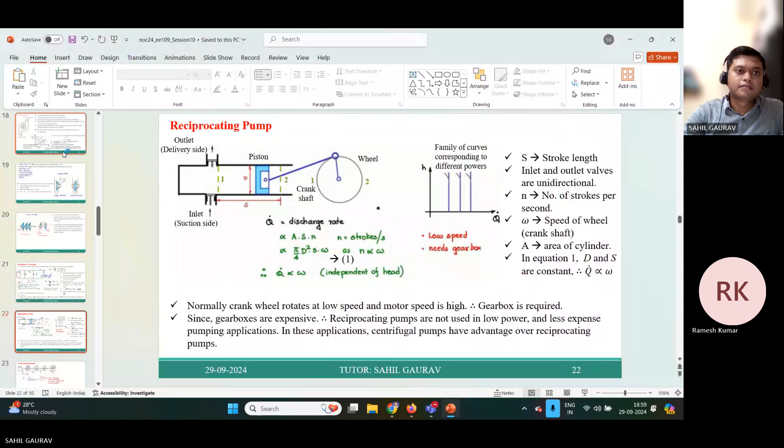Hello, Ramesh. Sir, I'm audible, good evening. We will wait for 3 to 4 minutes, if somebody joins, then we will start. Okay, but already time has passed, they can start.

I am in this meeting, nobody else is in this meeting. So we can wait, no problem, according to me, for a few minutes. One more attendee came. We can wait 1 to 2 minutes more. Yeah, sure.

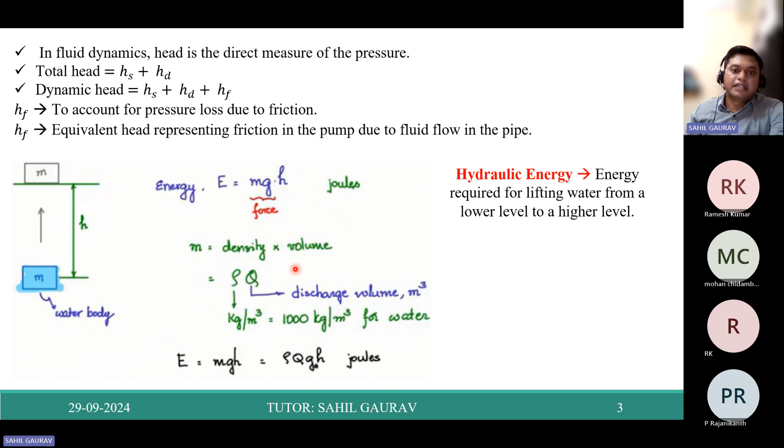Now if you substitute this value and write it in terms of volume of water and this height, with density of water as 1000 kg per meter cube and gravitational acceleration written as 9.81, it comes approximately equal to 10 to the power 4 Q H in joules.

Now there are some conversions that are very useful. We know this electrical energy unit: 1 unit is represented as 1 kilowatt hour. So if you write it in watt second or joules, 1 kilowatt equals 1000 watt, and 1 hour equals 3600 seconds. So it becomes equivalent to 3.6 into 10 to the power 6 watt second, or joules.

So if you substitute this, as we have seen this potential energy in joules, now if you want to write it in kilowatt hour, it is divided by 3.6 into 10 to the power 6, and you get kilowatt hour. So it will be 2.725 into 10 to the minus 3 Q H kilowatt hour, where volume is in meter cube and H in meter.

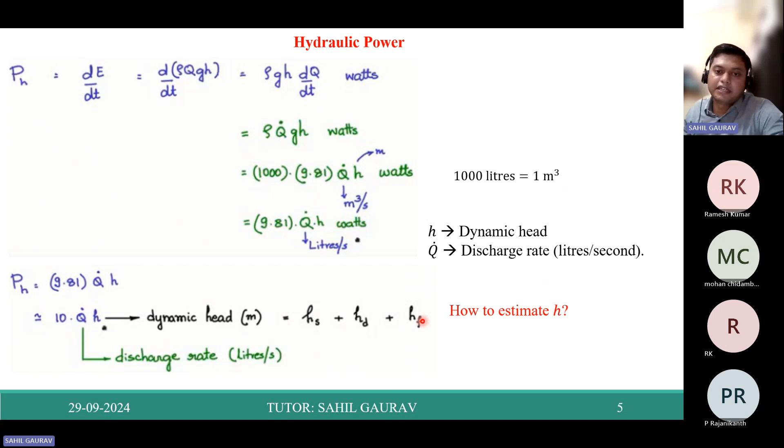So finally we are having this expression, where this discharge rate is in liters per second and height is in meters, and where this dynamic head equals HS plus HD plus HF. Now the question comes, how do we estimate H? We know this suction head, we know this discharge head, but how do we estimate this friction head loss? Let us see how we can estimate this HF, this head loss due to friction.

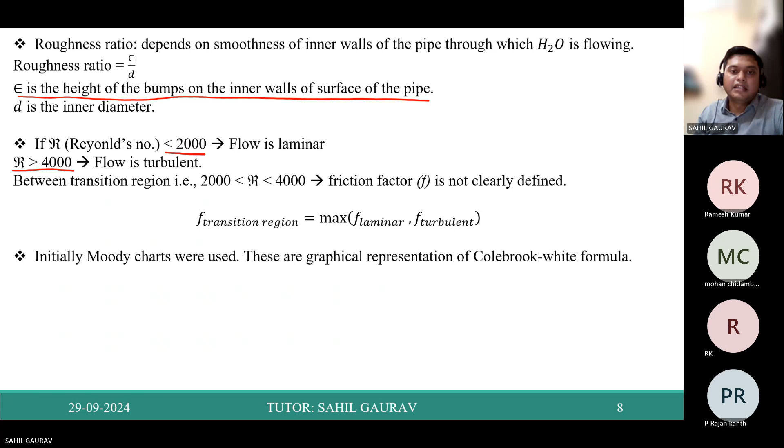So if the Reynolds number is 3000, we will find it through the laminar way and turbulent way, meaning we apply the laminar method and the Colebrook-White formula, and we take the maximum of it as the friction factor. Earlier, to find this friction factor, Moody charts were used, and these are the graphical representations of the Colebrook-White formula.

The friction factor is less for lesser roughness ratio value, the friction factor is of lesser value for the same Reynolds number. As the roughness ratio increases, the friction factor also increases.

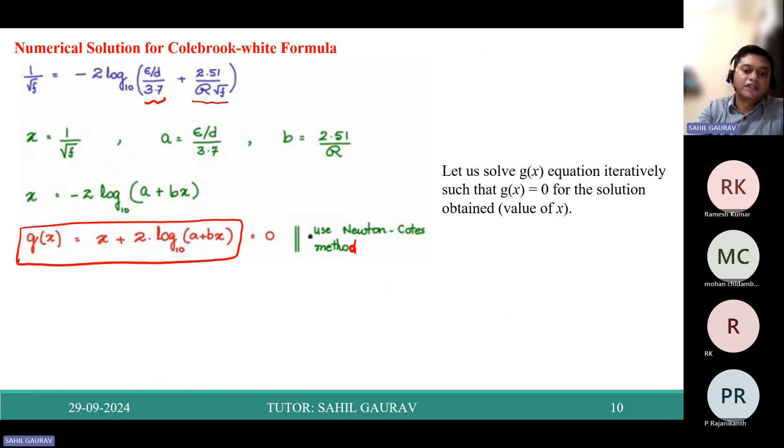So we have this function, and let us take the partial derivative with respect to x: we get 1 plus 2b upon (a plus bx). So Newton's method formula is g(xk) equal to delta x times del g upon del x at xk, where delta x is written as xk minus xk+1. This is the iteration.

So we will first assume some initial value, and using this Newton's method formula, we will iteratively solve this equation. Now you have to substitute the values for g(x) and g'(x) to solve this equation, and you will get the next term.

So we substitute g(xk) equal to x plus 2 log 10 of (a plus bx), and find g'(x), which comes out to 1 plus 2b upon (a plus bx). Upon simplifying, you will get the term for xk+1.

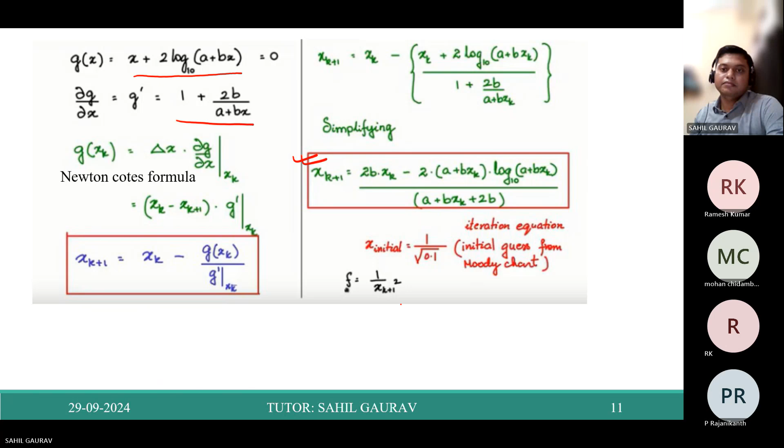So this is the summary of hydraulic power calculation.

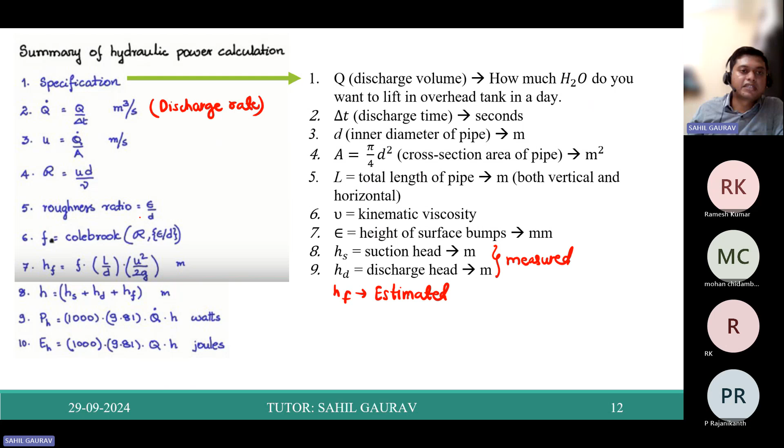So another term we need to know is HF, which should be estimated or calculated. Upon knowing this roughness ratio, we apply this based on the type of flow - laminar or turbulent. If there is turbulent flow, then you apply the Colebrook-White formula expression, and from there you get the friction factor, which you apply in this expression.

What is this expression called? This expression is called the Darcy-Weisbach formula.

Now we have all the head expressions, so we will find the total dynamic head. The total dynamic head is the sum of the suction head, discharge head, and the head loss due to friction.

Now we have to substitute this equivalent head in the hydraulic power calculation. The hydraulic power calculation is 1000 into gravitational acceleration constant 9.81 into discharge rate into this height, or equivalent dynamic head.

Then we will find the hydraulic energy. This hydraulic energy is what comes here - you have to take the volume of water irrespective of the discharge rate, taking the discharge volume while calculating the hydraulic energy.

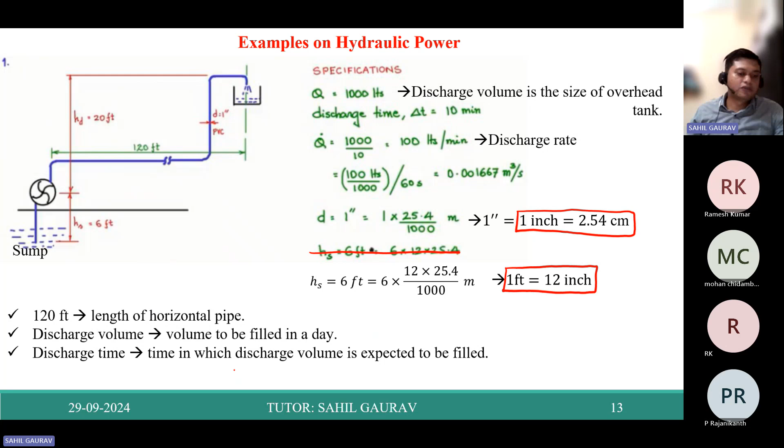As I said, this discharge volume is the volume to fill in a day, and discharge time is the time in which discharge volume is expected to be filled. Now coming to this total length of pipe.

Total length of pipe is suction head, and then we have this horizontal pipe length, and then the discharge head. So this comes to 146 feet. So you have to convert this into meter, and then you will find the cross section area of pipe, and then you will find the water velocity.

Then you will find this Reynolds number, and this Reynolds number is greater than 4000, therefore it is turbulent flow. And since this pipe is PVC, the height of bump on this inner pipe surface is 0, so this roughness factor is also 0.

And since this is turbulent flow, we will use the Colebrook-White flow expression to estimate this friction factor, and we got this friction factor as 0.018683, and then we'll use this head loss due to friction from the Darcy-Weisbach formula.

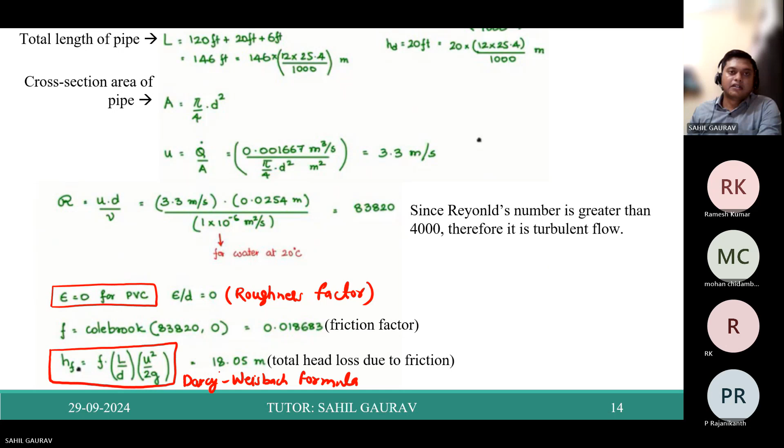Now you can find this total dynamic head: suction head plus discharge head plus head loss due to friction. And then we will find this hydraulic power. So it comes to 425 watt. So this much hydraulic power we needed to pump the water from the sump to the overhead tank.

Now, apart from this, in the previous example we have not used solar PV. Now in this example we will use solar PV. In this case of solar PV, it is based on the radiation. So let us not put a constant for this delta T, that is discharge time. Apart from taking discharge time as 10 minutes or something, very less time, let us link it to the insolation at the place, meaning we are giving the discharge time more.

So in solar PV, what we used to do is increase the overhead tank size because we have increased the discharge time based on atmospheric effects, meaning based on the irradiation. So we have to increase our overhead tank so that we have the capacity to discharge in more time.

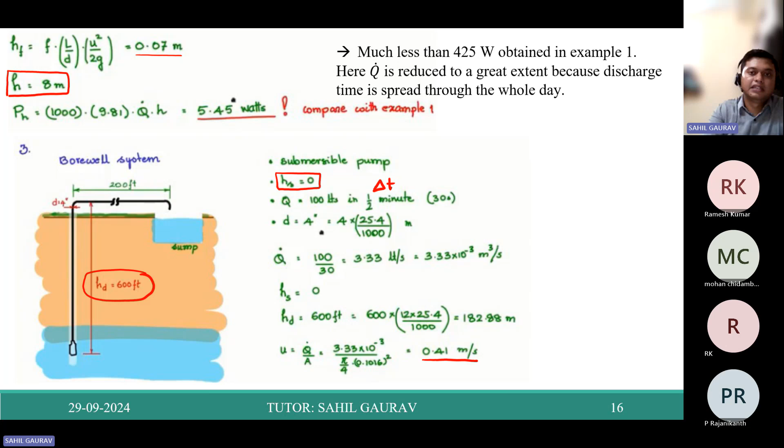Then you can find the Reynolds number to find the head loss due to friction. Reynolds number is u d upon nu, and nu is given in the problem, so it comes out as 41,656. So it is turbulent flow, and the height of bump in the pipe is given as 0.1 mm for a steel pipe.

So we have taken the steel pipe here, and the roughness factor we got is 0.001. Once the roughness factor is known, and since this is turbulent flow, we will apply the Colebrook-White formula to get the friction factor. Upon knowing this friction factor, we will apply the expression H to get the head loss due to friction. This is an empirical relationship, and this is the Darcy-Weisbach equation.

Now we'll find the total dynamic head, that is the sum of all the heads: suction head plus discharge head plus head loss due to friction. This gives us 183.4 meters. Now we'll find the hydraulic power, which comes as 5.99 kilowatts. So for this application, you can use a 7.5 or 10 HP motor, because you have to use more than the hydraulic power that is needed. So you can take the motor accordingly.

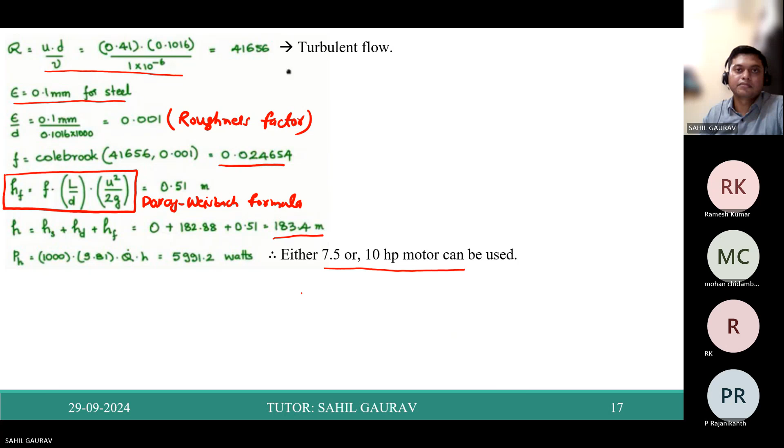Now coming to the types of pumps. There are two pumps covered in this course: one is the centrifugal pump, and the other is the reciprocating pump. The centrifugal pump comes under the class of dynamic pumps, and its operation is based on centrifugal force. This pump rotates at high speed and creates a pressure difference. This pressure difference created due to high speed rotation sucks in water and routes it towards the center. We will see one video based on centrifugal and reciprocating pumps. Because of the centrifugal force, water is pushed out at the outlet creating pressure difference, and the process continues. Therefore, the higher the speed of water, the larger the pressure difference, and the more the discharge.

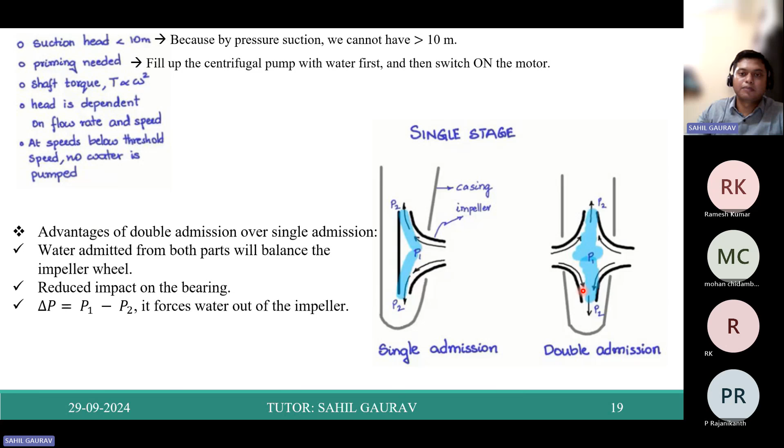If you see this multi-stage, you have cascaded pumps. So in multi-stage also there will be single admission and double admission. This multi-stage is used for deep wells, or in case of submersible pumps where you have to pump to a greater head, multi-stage impellers are normally in the pump. In multi-stage, delta P gets added from one stage to the next. Because of the addition of pressure, there is sufficient differential pressure from first to last stage, which helps in pumping water to greater heights. So this is the benefit of multi-stage, generally used for deep wells or submersible pumps.

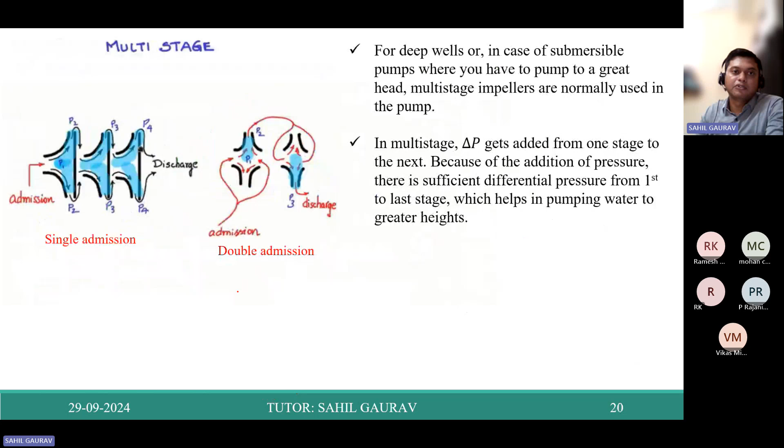Normally the crank wheel rotates at lower speed while the motor speed is high, therefore we require a gearbox. This crankshaft doesn't have that much speed, while the motor speed generally is higher, so we require a gearbox if we are using the reciprocating pump.

And since gearboxes are expensive, reciprocating pumps are not used in lower power and less efficient pumping applications. In this application, centrifugal pumps have an advantage over reciprocating pumps.

And this is the water pumping system. So we have a PV panel and power converter, motor, then pump, and then hydraulic system. So how much PV power would be required for the pump to deliver that much hydraulic power?

Based upon the efficiency of these interfaces - power converter, motor, pump - it comes to approximately 2 times the hydraulic power. So this is the size of PV required for the Hatmin condition of the annual insolation.

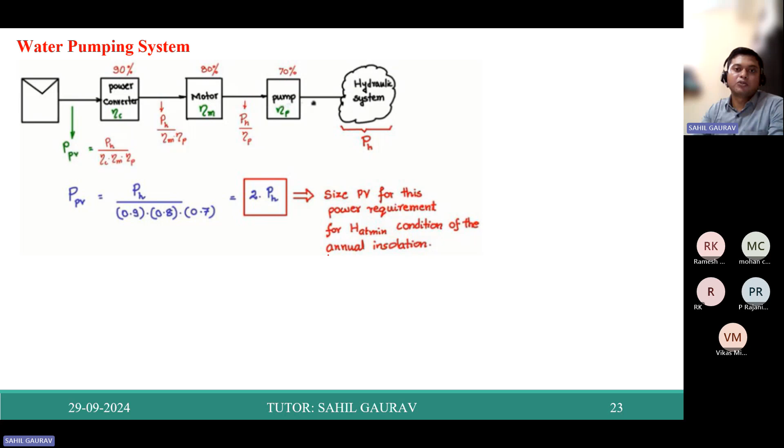And there are some pumped hydro applications. I would say you go through it.

This one is water pumping, so it is the same - here the same motor is used as generator and the same pump is used as turbine.

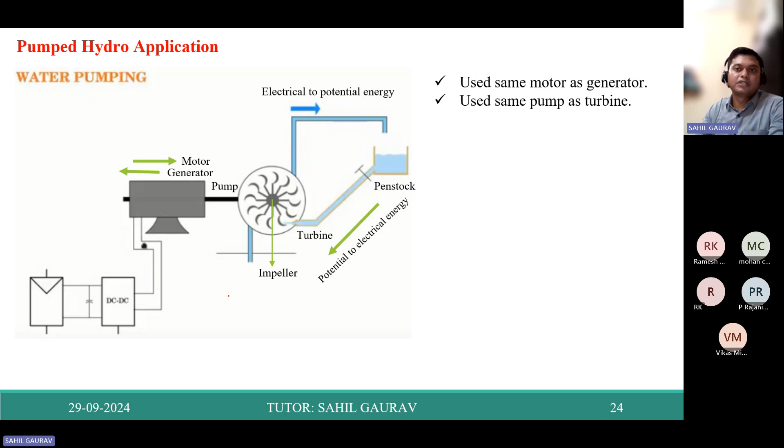While in this decoupled system, we have a different motor and a different generator. So the advantage of the decoupled system is that water can be pumped up at lower power and spread across the whole day.

This hydraulic power needed is low, and the electrical output during night time can be high power output in AC or DC form. But the disadvantage is that you need to install two systems, that's why it has additional cost.

And these are some of the representations for this hydropower expression.

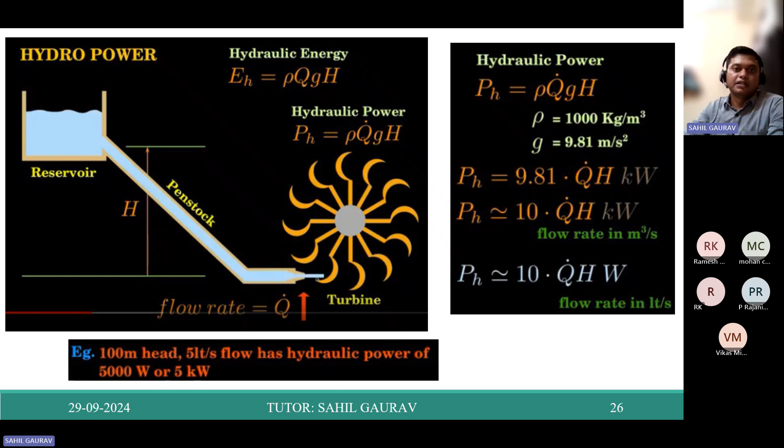I would suggest you go through these slides, and because we have less time, let us come to solving the problem. But before that,

I have put two videos so that you can see and differentiate between the reciprocating pump and the centrifugal pump. The first one is the reciprocating pump.

Can anyone verify that you are able to listen to the video? When I am running it, are you able to listen to the video? Yeah, it's visible. Okay, and it's running.

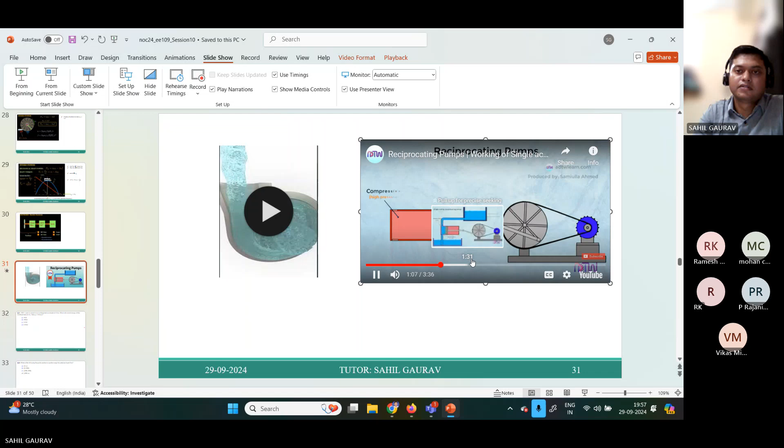So I will just keep it here. You can go through this. So you can see this reciprocating pump.

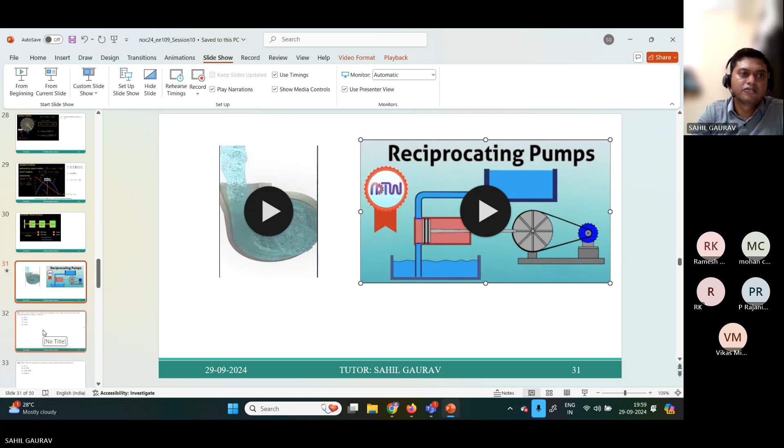So let us see the first problem. The first problem is quite an easier one.

1000 liter of water is stored in an overhead tank at a height of 10 meter. What is the stored energy of that overhead tank in kilojoule? Take the gravitational acceleration constant as 9.8 meter per second square. And the options are shown over here.

So I would request you all to solve parallelly with me. And if you are getting the answer, you can tell your answer or type it in the chat box.

Okay, you are not able to listen to the sound. No problem, you can find many types of videos, but I hope you will see the visualization of how these are working - this reciprocating pump and centrifugal pump.

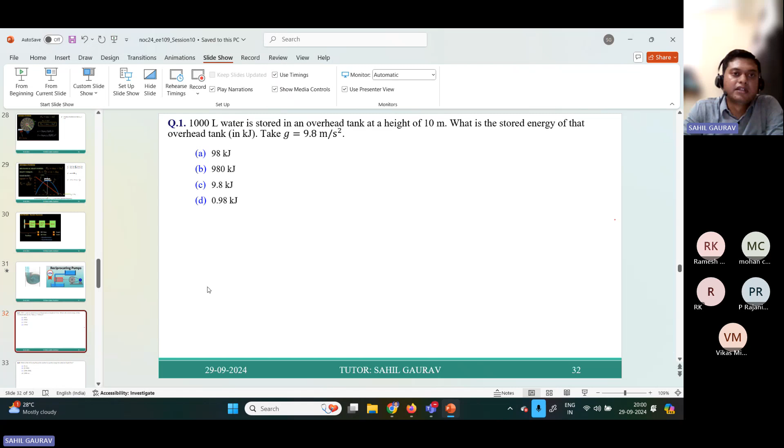So let us solve problem number 1. First we will write what is given and what they are asking.

The given is discharge volume, so discharge volume is given as 1000 liter. Whenever liter is given, first you need to convert it into meter cube. So 10,000 liter, we convert it to meter cube, we know that we have to divide by 1000.

So it will be 10 meter cube. And now height is given - here there is no different types of height, it is single, so you can call it static height. It is given as 10 meter.

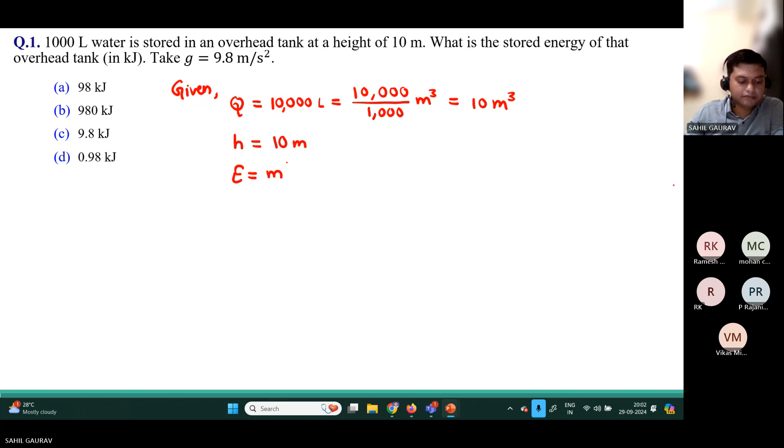And what is the stored energy of that overhead tank? Q, we know is 1000 liter given.

Okay, it is a mistake, it is 10,000, not 1,000.

So you can find the stored energy, that is the potential energy. So potential energy will come as mgh, so you can write m equal to rho times Q.

Rho is 1000 kg per meter cube, then Q is 10 meter cube, g is 9.81 meter per second square, and h is 10 meter.

So you will get 980 into 10 to the power 3 joule. The answer is 980 kilojoule. So the correct answer is B, 980 kilojoule.

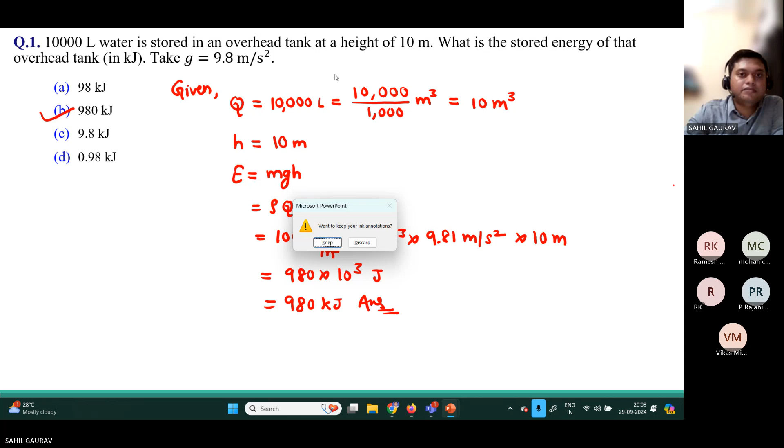Yes, RK, if you have taken Q as 1000 liter, then it is correct. Rajnikant, you are also correct. Very good.

Now let us see the next problem. The second problem is: which of the following Reynolds number is a perfect range for turbulent liquid flow? We have discussed it in class and revised today also, so I want you all to give the answer.

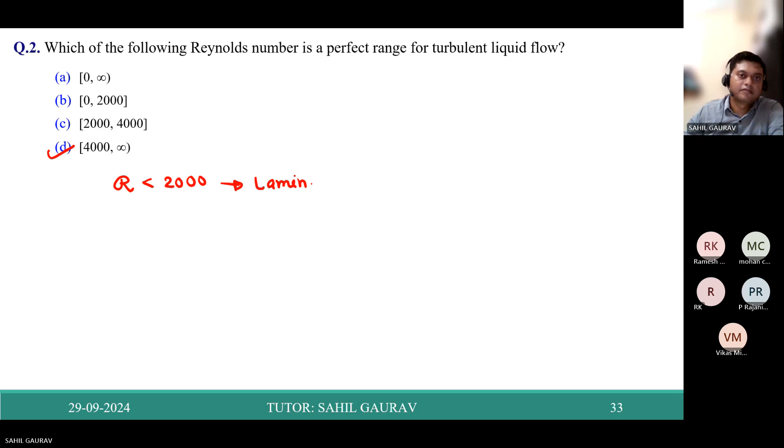Yes, it is D, RK, you are true, that is D. So when Reynolds number is more than 4000, water has turbulent liquid flow, so D is the correct answer. And when this Reynolds number is less than 2000, then it is laminar flow. And when this Reynolds number is more than 4000, it is turbulent flow.

Let us see the next problem. What is the roughness factor for a steel pipe with 0.8 inch diameter? This is also quite simple. You have to find the roughness factor for a steel pipe with 0.8 inch diameter, so you need to know how to convert inch into meter or millimeter.

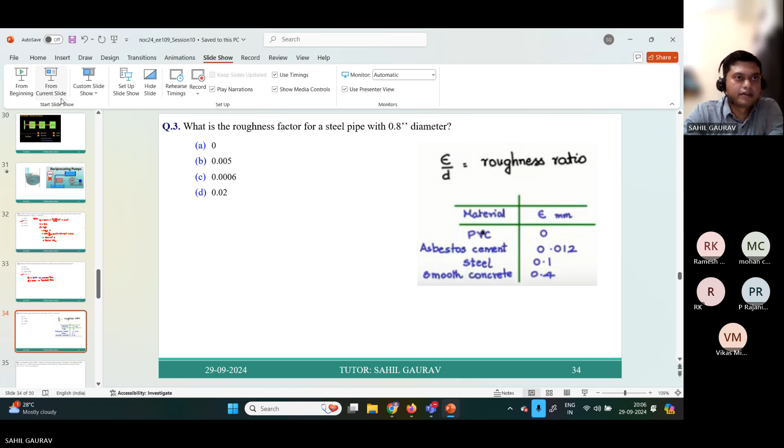We know the roughness factor expression: epsilon upon d, where epsilon is the height of bump inside the pipe. This is a steel pipe, and steel pipe has epsilon equal to 0.1 mm. So 0.1 mm is the epsilon. We have to find the d, so how will we find the d?

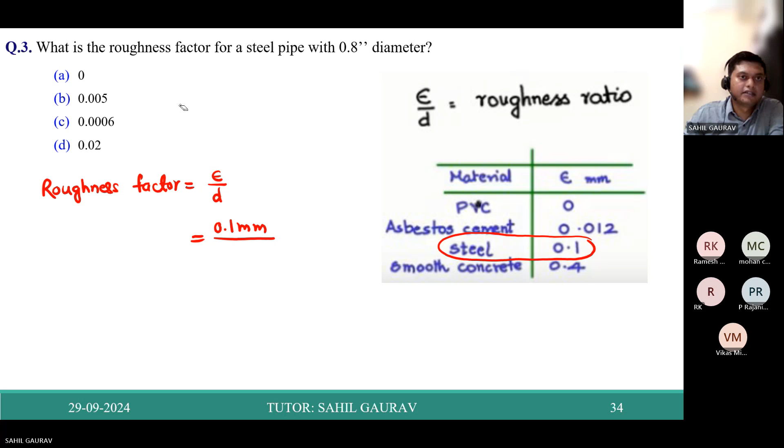So epsilon of a steel pipe is 0.1 mm, and diameter of pipe is 0.8 inch. Converting inch into millimeter, you have to multiply with 25.4 mm. So put here 0.8 into 25.4 mm, and you will get 4.92 into 10 to the power minus 3, that is 0.00492, approximately equal to 0.005. So correct answer is B.

Yes, RK, you are correct. Correct answer, Rajnikant, you are correct. Very good. So those who are solving problems here, that is very nice. Don't leave it for later, because it will just become late.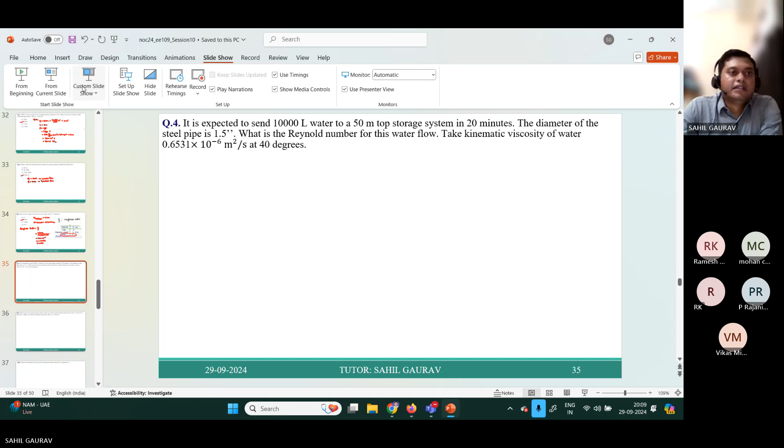So you have to find the Reynolds number, and for Reynolds number, you have to find the water velocity, and for water velocity, you have to find the discharge volume. So let us first write what things are given here.

We are given discharge volume as 10,000 liter, and height is given as 50-meter storage system, and then delta T, discharge time, is given as 20 minutes, and then diameter of a steel pipe is given as 1.5 inch.

Diameter of pipe is 1.5 inch. Let us convert it right now to meter. So 1.5 inch into millimeter will be 25.4 millimeter, then you have to divide by 1000 to get it in meter. So you will get 0.0381 meter.

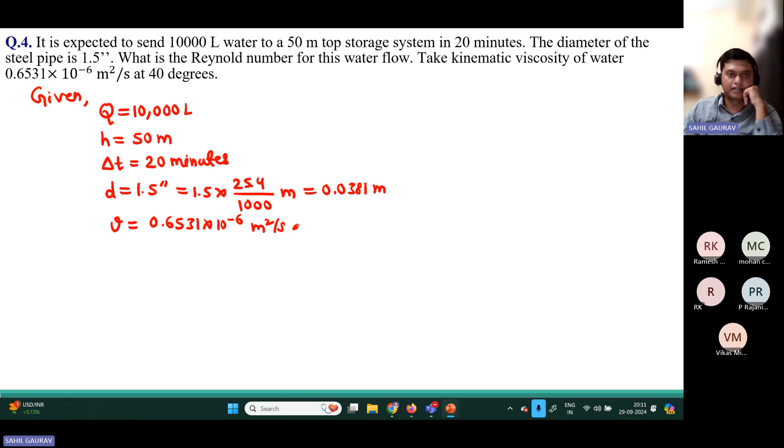The kinematic viscosity of water is also given: 0.6531 into 10 to the power minus 6 meter square per second at 40 degrees Celsius. You have to find the Reynolds number.

You have to find the Reynolds number. First we need to know the Reynolds number expression, that is u d upon nu. So this is the Reynolds number expression. We know d and nu, but we don't know the u. So before that, we will find the u. u will be q dot upon a.

We don't know q dot, so we will first find the q dot. q dot, the discharge rate, is q upon delta t, discharge volume upon discharge time. This discharge rate will be 10,000 liter. 10,000 liter you can write in meter cube, so it will be 10 meter cube.

And then 20 minutes, you can write in seconds. So it is 1200 seconds, which is 8.33 into 10 to the power minus 3 meter cube per second.

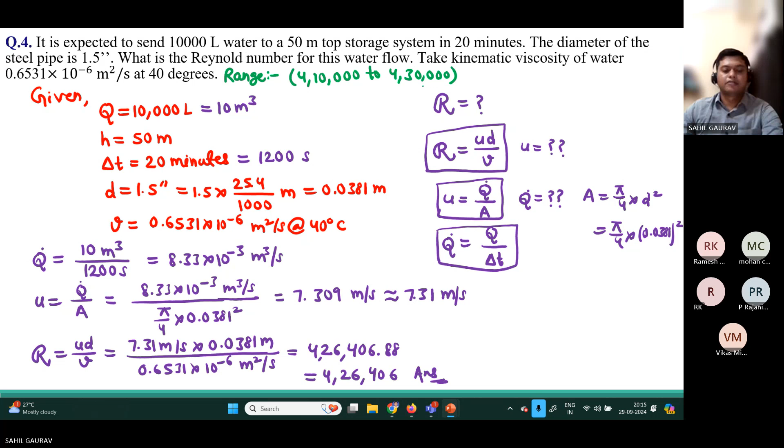They have provided answer in the range, and the range they have provided for this problem is 4,10,000 to 4,30,000. Yes, 4,26,406. Very good, Rajnikant.

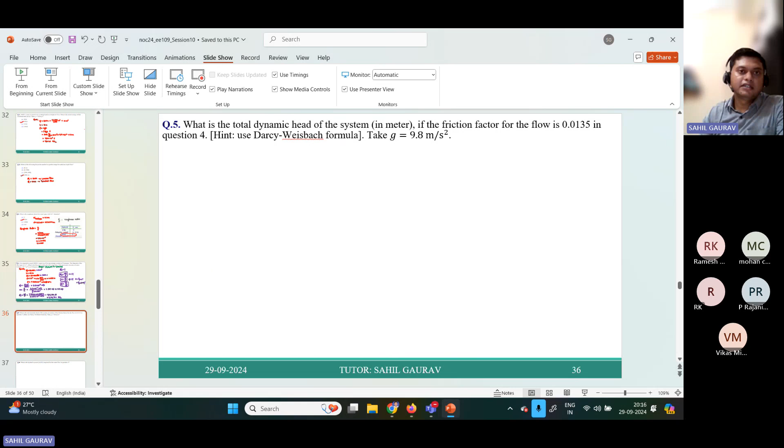So let us see the next problem. What is the total dynamic head of system in meter if the friction factor for the flow is 0.0135 in question 4? So they have provided the friction factor. You have to find the total dynamic head. Let us show.

So in this problem, they have provided the friction factor 0.0135 meter, and acceleration constant they have told you to use 9.8 meter per second square, and you have to use this Darcy-Weisbach formula. This friction head equals F into L upon D into U square upon 2G.

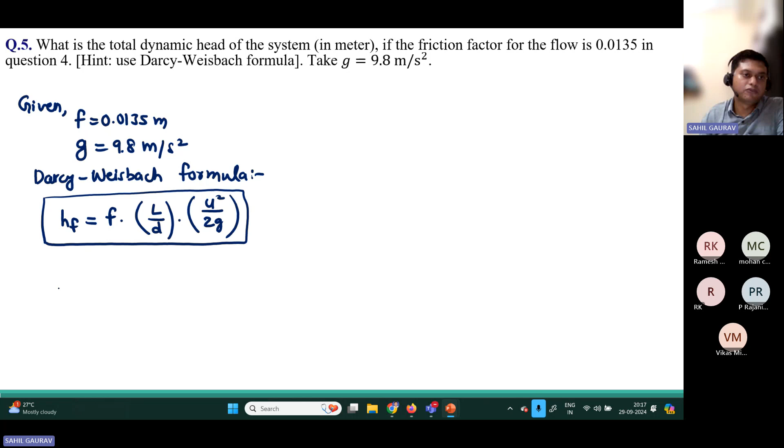So what are the things given here? For using this Darcy-Weisbach formula, we have to use the length of pipe L, which is at 50 meter height. So length of pipe will be 50 meter. Inner diameter of pipe we have found is 0.0381 meter, and the water velocity is 7.31 meter per second.

Therefore, HF will be 0.0135 into 50 upon 0.0381 into 7.31 whole square upon 2 into 9.8.

So the head loss due to friction will be coming as 48.3 meter. Therefore, total dynamic head, that is height of the overhead tank, is 50 plus HF.

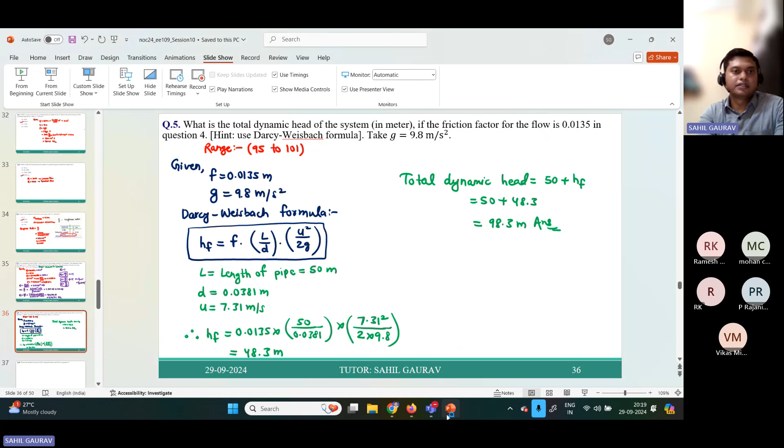I think no one got the answer. So let us, if you have any doubt, you can interrupt me. No problem. What is the hydraulic power required for water flow in question 4?

So we have found the total dynamic head. Now it becomes so easy. We have found this total dynamic head H, and we know that hydraulic power is nothing but rho G Q dot H.

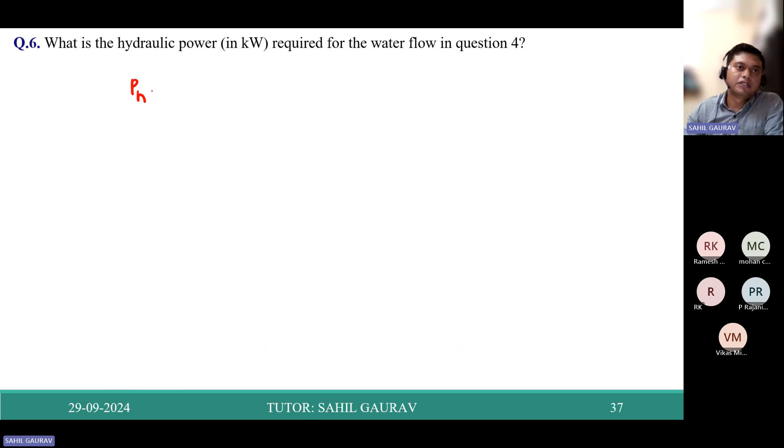Hydraulic power we know is rho q dot gh. So this simple expression we have to use, and it has been used many times. So we have to remember this expression. Rho is 1000 kg per meter cube.

We have found q dot is discharge rate 8.33 into 10 to the power minus 3 meter cube per second, and then g is 9.8 meter per second square, and dynamic head is 98.3 meter. So we will get discharge and hydraulic power as

8024.62 watt. So they are asking in kilowatt. So it is 8.024 kilowatt. So this is the answer.

And the range they provided for this problem is 7.7 to 8.3.

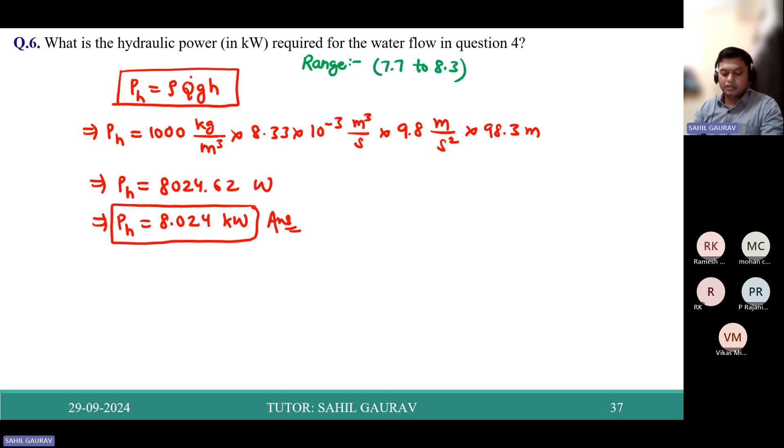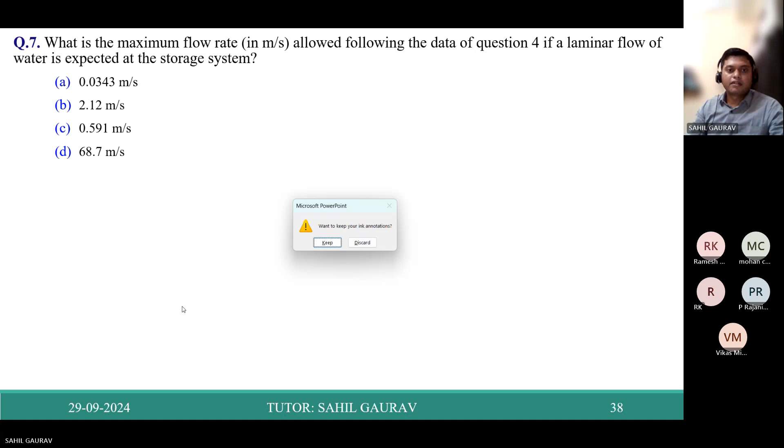Now next problem: what is the maximum flow rate in meter per second allowed, following the data of question 4, if laminar flow is expected at the storage system? So since you got this turbulent flow, but they are asking you to take the laminar flow.

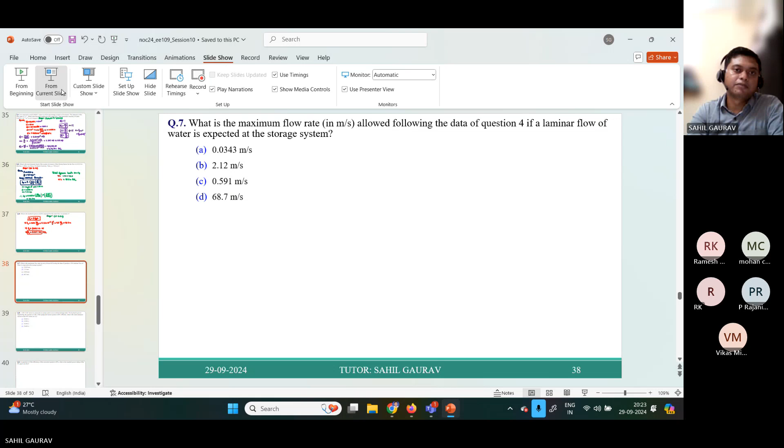You got the Reynolds number as 4,26,406, but they have asked you to take it as laminar flow and then solve the problem. So it is quite simple, not that much complicated. So they are asking U max equal to what, so that we will get the laminar flow, to get the laminar flow.

And this laminar flow condition is that you have to have Reynolds number less than 2000. This is the condition for laminar flow. So we know that Reynolds number expression is UD upon nu.

So for laminar flow, you can write U as Reynolds number into viscosity upon D. So you can get U max as R max into kinematic viscosity upon D. So this expression you have to use for laminar flow.

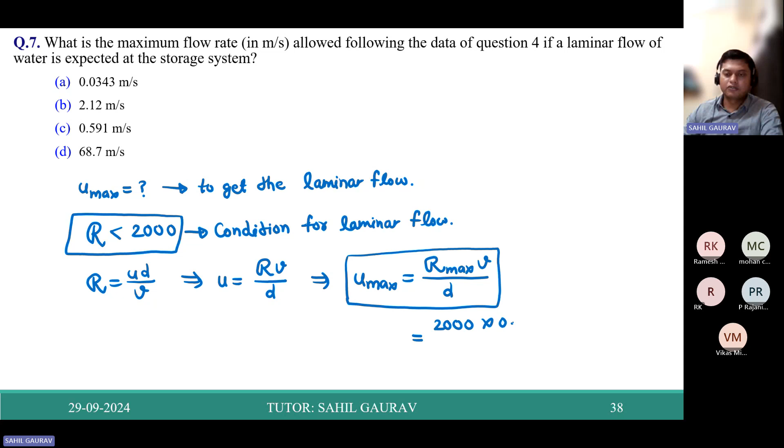So you have to put R max as Reynolds number maximum 2000. Kinematic viscosity they have provided earlier in the question, that is 0.6531 into 10 to the power minus 6 meter square per second, and D is 0.0381. So you will get the answer as 0.03428 meter per second. So the correct answer is approximately equal to 0.0343. So A is the correct answer.

Will there be a topic on mounting structure selection of metal frame that can withstand 120 km per hour of wind speed, wind load, snow load? I think this topic sir has not covered, and I think we have to investigate which.

Rajnikant, you are correct. Miss, what are you asking about, Mohan? Formula is required.

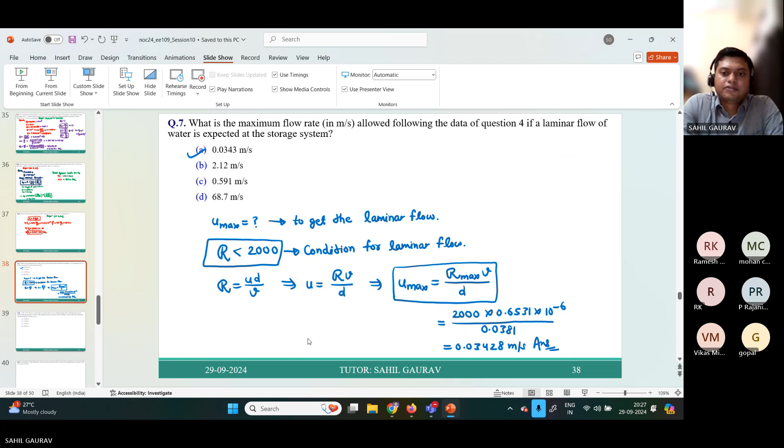So let us see the next problem. In this problem, a 400 volt DC motor is connected to pump water to an overhead storage tank. The hydraulic power required by the system is 5 kilowatt. If the pump and motor system is 60% efficient, what is the rated current of the DC motor in ampere?

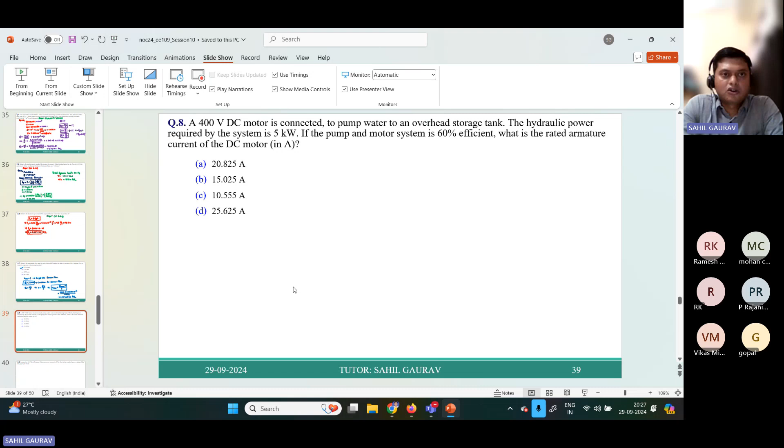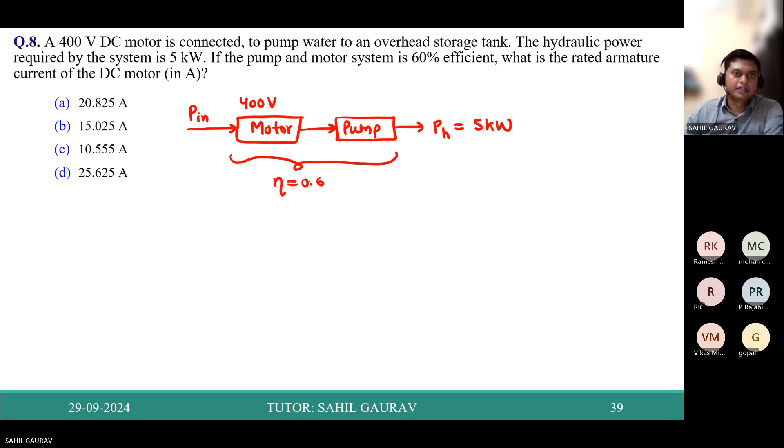So a motor is connected to the pump and that is providing hydraulic power of 5 kilowatt. If the pump and motor system is 60% efficient, so this efficiency is 0.6. What is the rated armature current of the DC motor? So let us take, we are providing the input power, and this motor is 400 volt rated. The hydraulic power they have provided as 5 kilowatt. And they are asking about the armature current of the motor.

Since efficiency is given, we can find the input power, that is hydraulic power upon efficiency. So it is 5 upon 0.6, so we will get 8.33 kilowatt. And input power you can write as voltage into armature current. So this is 8.33 into 10 to the power 3, voltage is 400 volt, armature current you have to find. So armature current you will get as 20.83 ampere. So correct answer is 20.825.

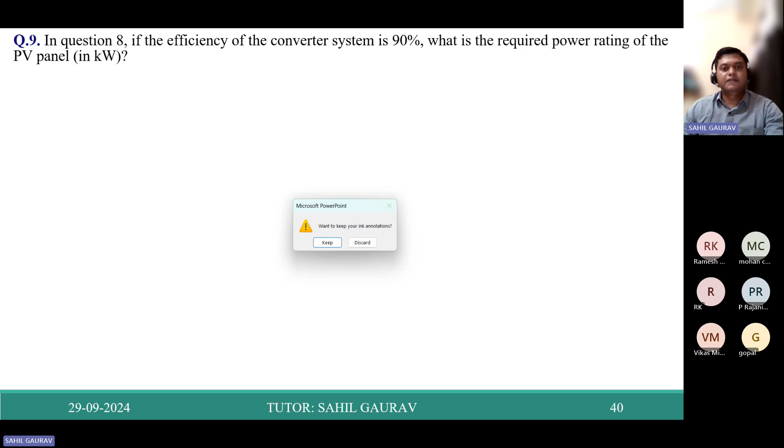Let us see the next problem. In problem 8, if the efficiency of the converter system is 90%, what is the required power rating of the PV panel in kilowatt?

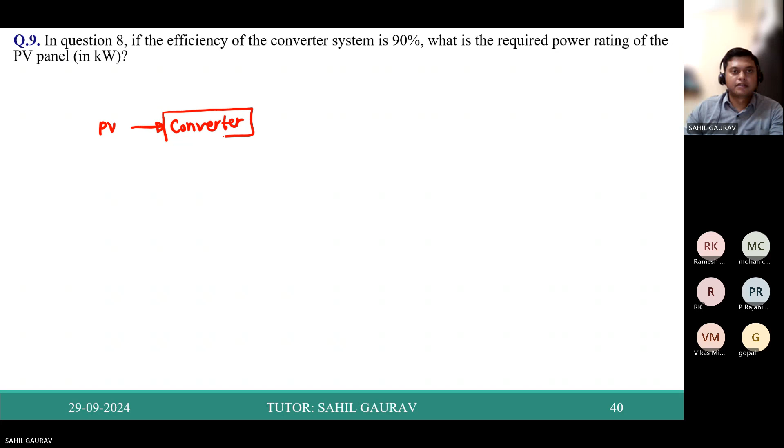So it is asking, here we are having the PV panel first, and then it is connected to chopper or some converter, and is connected to motor, and then it is connected to pump, and this is providing the hydraulic power of 5 kilowatt. So till here we have calculated in the previous problem.

So here we are getting efficiency as 0.6 and input power as 8.33 kilowatt. It is asking that converter efficiency is 0.9. So what is the power rating of the PV panel? So it is hydraulic power upon all the efficiencies, 0.9 into 0.6. So 5 upon 0.6 into 0.9. So it is 9.259 kilowatt, approximately equal to 9.26 kilowatt.

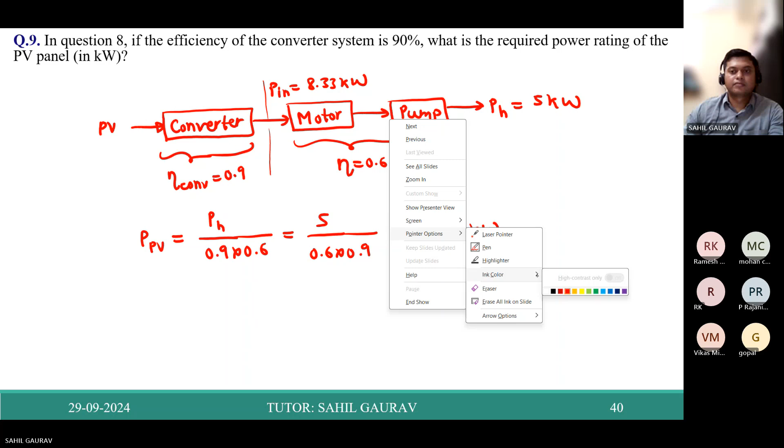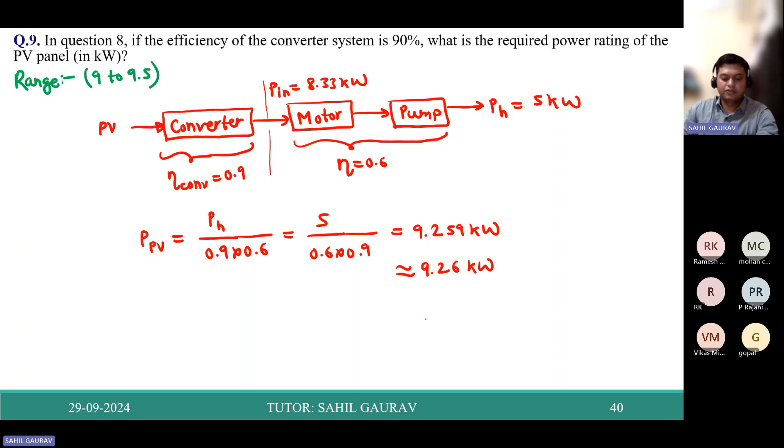And the range NPTEL has provided for this problem is 9 to 9.5. If you see the PV panel rating, then it is approximately equal to double the hydraulic power, as we have seen in the lecture. So hydraulic power is 5 kilowatt, you are getting the PV power rating as 9.26 kilowatt, so it is approximately double the hydraulic power.

Let us see the next problem. The diagram below is for: a single stage single admission centrifugal pump, multi-stage single admission centrifugal pump, single stage multi-admission centrifugal pump, or multi-stage multi-admission centrifugal pump. Please all of you write your answer in the chat box.

The diagram, this one is for which type? I got one answer, Rajnikant. Other one?

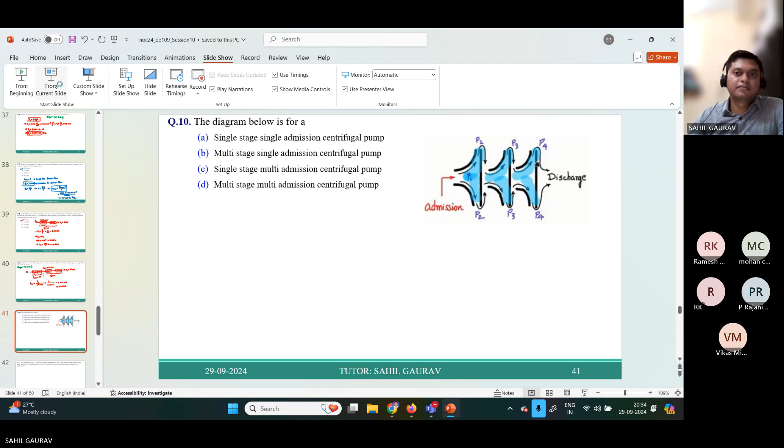Since the pumps are cascaded, it is multi-stage. So the first thing is confirmed that it is multi-stage, because they are cascaded. Now for single or double admission, you have to say the number of admissions. Since there is only one inlet, it is single admission. If there are two inlets, then it is double admission, multi-admission. So it is multi-stage single admission centrifugal pump. So B is the correct answer.

Now let us see the next problem. A water tank of 1000 liter capacity is located at a height of 10 meter. Calculate the energy storage in the water tank at 80% of tank capacity in joules. So here, the tank capacity is 1,000 liter, but they want to fill the tank 80% only. So accordingly, you have to calculate the energy stored.

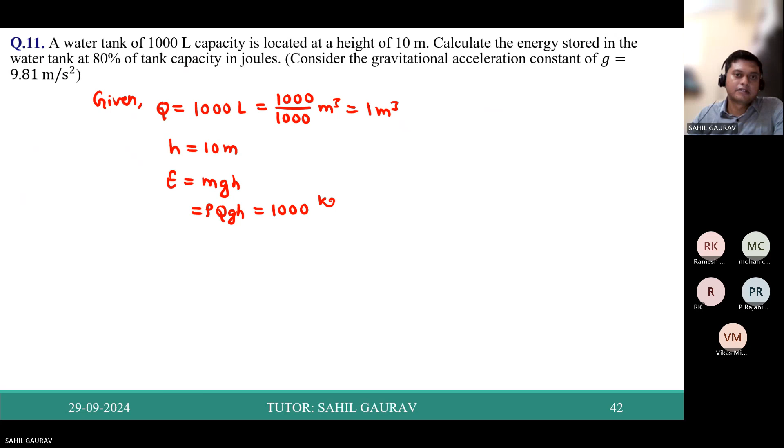Given water tank capacity is 1,000 liter. If you write in meter cube, it is 1,000 upon 1,000, so it will be 1 meter cube. And height is 10 meter. Therefore, potential energy stored will be mgh, that we know is rho Q g h. So it is 1,000 kg per meter cube, Q is 1 meter cube, G is 9.81 meter per second square, and H is 10 meter. So you will get...

98,100 joule. Is this correct or incorrect? Can anyone tell? Whatever the answer we got, is it correct or incorrect? Yes, it is incorrect. So we have to multiply with 0.8. So we have to take 80% of tank capacity, not 100%.

You can at the start take this discharge volume as 0.8 into the tank volume, or you can apply it at the end. So E into 0.8 gives 78,480 joule as the answer. And the range NPTEL has given for this problem is 78,400 to 78,600.

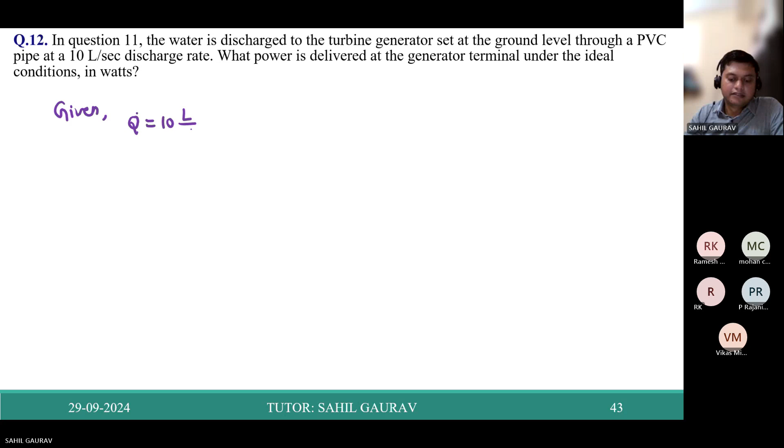Now let us see the next problem. In this problem, the water is discharged through a PVC pipe at 10 liter per second. So you convert into meter cube per second. It will be 0.01 meter cube per second. You have to find the hydraulic power.

Hydraulic power at a generator under ideal conditions. We know hydraulic power is rho Q dot g h. So it is 1,000 kg per meter cube into 0.01 meter cube per second, G is 9.81 meter per second square, H is 10 meter. So we will get 981 watt as the answer.

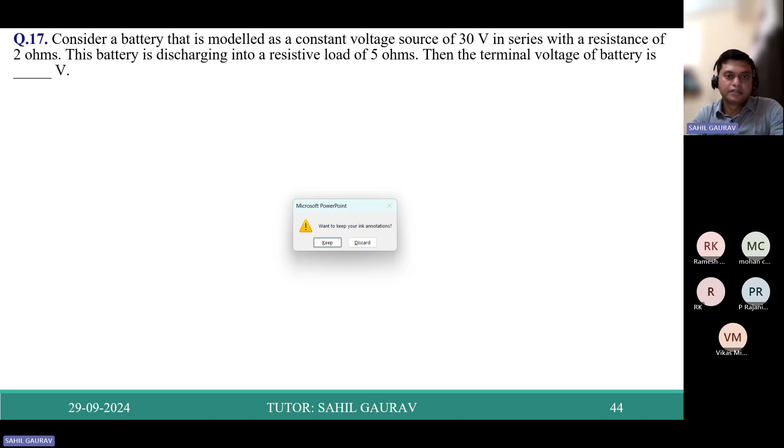And the range NPTEL has provided for this problem is 975 to 986. So let us see the next problem. Consider the battery. Oh God, I think it is... So I have to remove this. This one is the problem, problem 13.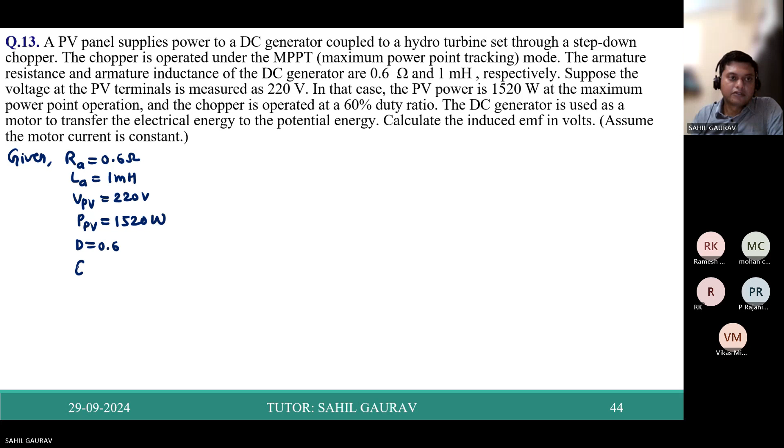This is lengthy, given in a lengthy manner, but it is not that much difficult. So let us take this and first write down the parameters they have provided. Armature resistance is 0.6 ohm, armature inductance is 1 millihenry, PV voltage is 220 volt, and PV power is 1520 watt, and duty ratio is given as 0.6. They have asked us to find the induced EMF, that is back EMF, in volts.

So let us make the diagram first. Let us take this as PV panel, connected to a step down chopper, which is connected to this DC motor. This is RA, LA, and this is EB. This is armature voltage, and this is PV voltage, 220 volt, and this is the PV current. The PV power they are providing is 1520 watt, and this duty ratio of chopper is given as 0.6.

If duty ratio is given, we can directly find this armature voltage as D into VPV, D into 220. So duty cycle is 0.6 into 220, so it is equal to 132 volt.

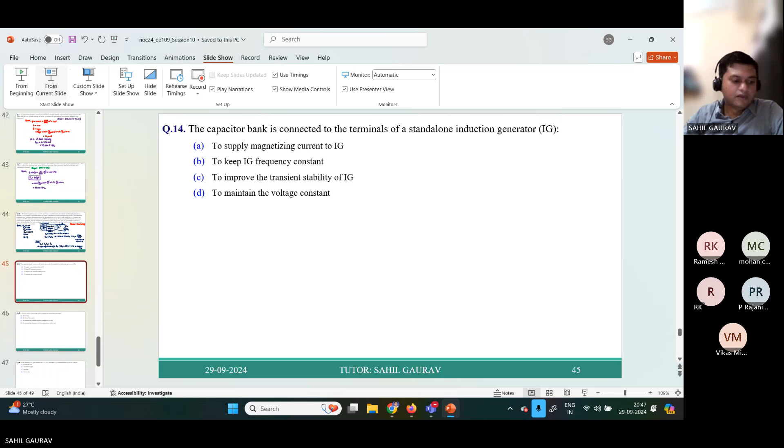Now let us see the next problem. The capacitor bank is connected to the terminals of a standalone induction generator. The reason is to supply the magnetizing current to IG. Why is it so? The induction generator does not have a separate field winding like a synchronous generator, and hence needs an external source to supply the magnetizing current. Therefore, the capacitor bank provides the necessary reactive power to maintain the magnetic field required for operation.

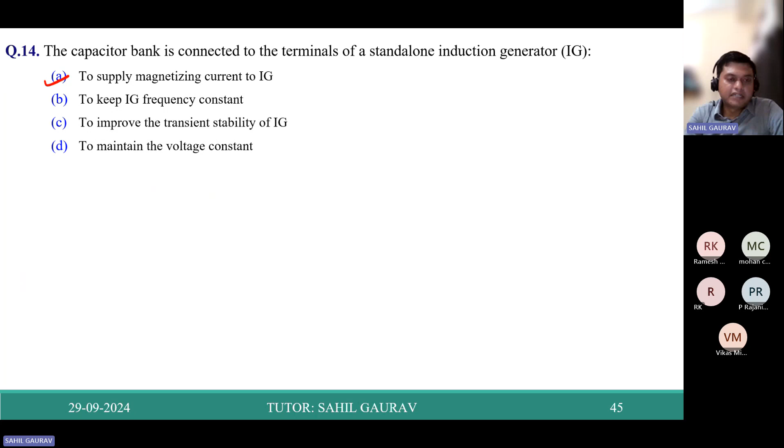So the correct answer is that this capacitor is connected to the terminals of a standalone induction generator to supply the magnetizing current to the induction generator. Because this IG does not have a separate field winding like a synchronous generator, and this needs an external source to supply the magnetizing current, and this comes from the capacitor bank.

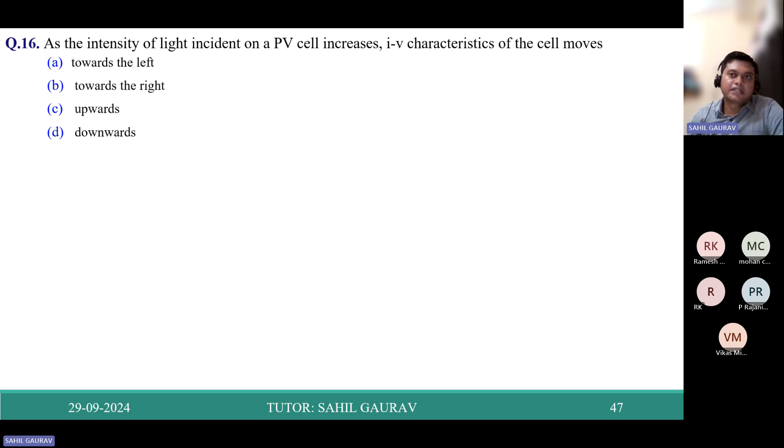Now coming to the next problem. As the intensity of light incident on a PV cell increases, the IV characteristic of the cell moves upwards. We know all about this.

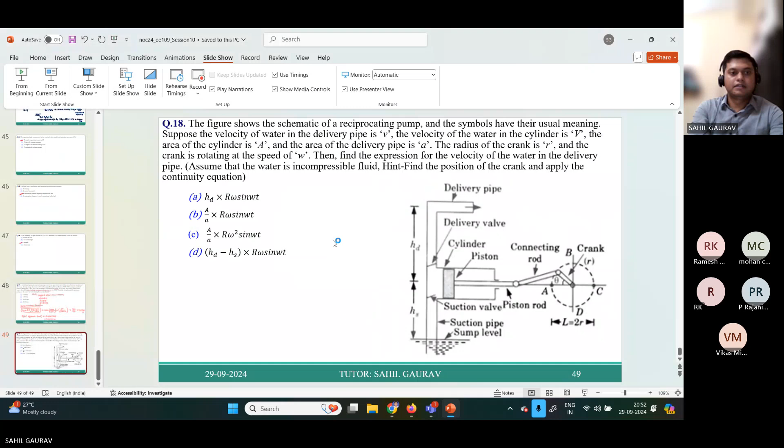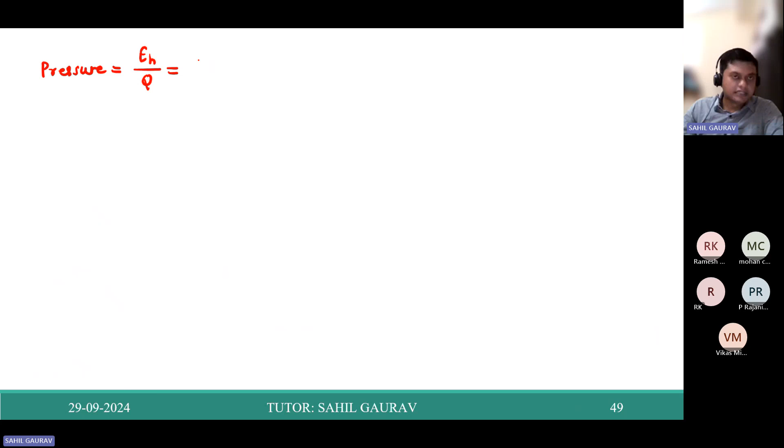So we have found the total dynamic head. Now we have to find the pressure. So pressure, we know that it is energy per unit volume. So the energy is EH upon Q, and we know that hydraulic energy is rho Q GH upon Q. So it is rho GH. Therefore, this pressure will come as...

1000 kg per meter cube into G is 9.81 meter per second square, into dynamic head which is 45.7742 meter. It will be 449050 Pascal. So this much is in Pascal.

So you have to convert Pascal into bar. So we know that 1 Pascal equal to 10 to the power negative 5 bar. Therefore, this pressure will be 4.49050 bar.

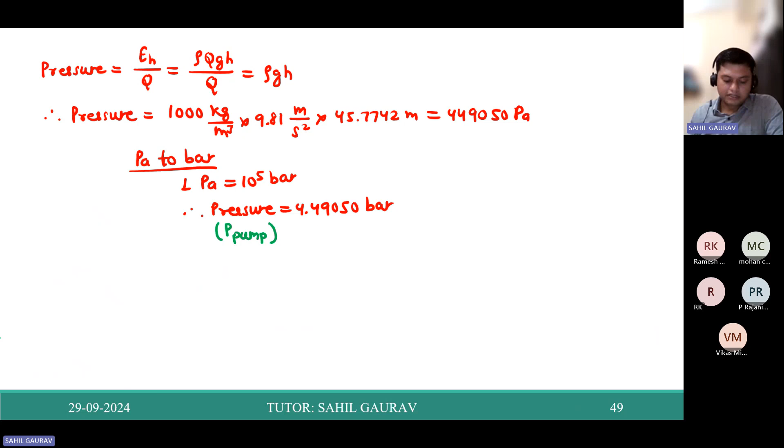Now, whatever the answer we got, this is not the absolute pressure, because there is some atmospheric pressure also. This pressure is the pump pressure, so this pressure exists at the pump. So the total pressure at the pump exit.

So the total absolute pressure will be, you can write the total absolute pressure is the sum of pump exit pressure calculated and the total atmospheric pressure.

And atmospheric pressure equal to, 1 atmospheric pressure equal to how much bar? It is 1.013 bar. Therefore, we can write P absolute equal to P pump exit pressure plus atmospheric pressure.

So P pump is 4.49 plus atmospheric pressure is 1.013 bar. Therefore, you will get 5.503 bar as the answer.

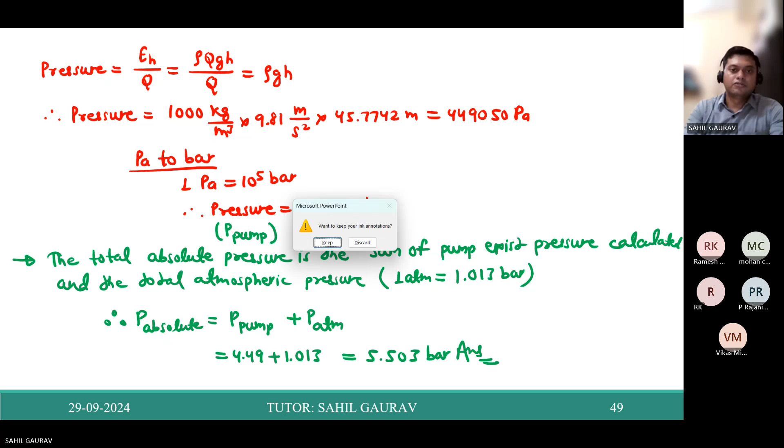So this is the answer for the second last problem. The correct answer for this problem is B, 5.503 bar.

Now let us see the last problem. This problem is also very easy, not that complex. You need to know this continuity equation. If you know the continuity equation, then you can easily solve the problem.

And the continuity equation for an incompressible fluid state, for an incompressible fluid, this flow rate remains constant.

Now we will apply this flow rate here. Therefore, flow rate at the cylinder equal to flow rate at the delivery pipe.

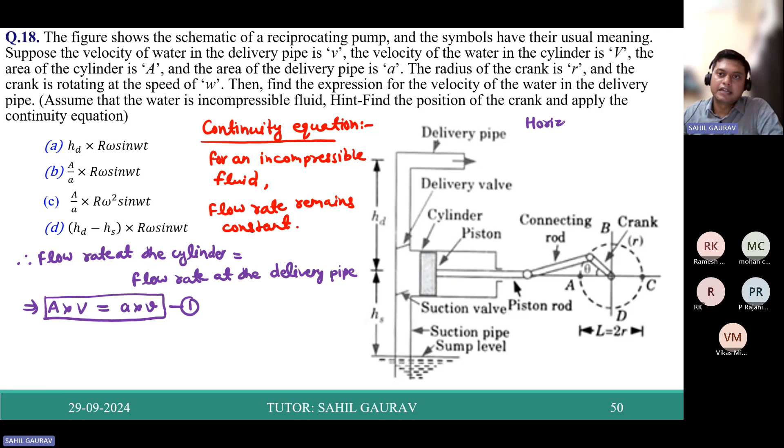Now this horizontal displacement of piston, you can write horizontal displacement of piston equal to x equal to r cos theta.

So taking derivatives, take dx upon dt. So it will be v, and then we will take derivative of r cos omega t upon dt. So this will provide you v equal to minus r omega sin omega t.

So we will take the magnitude only. Taking magnitude of this displacement derivative, we get v equal to r omega sin omega t. So this is the second equation.